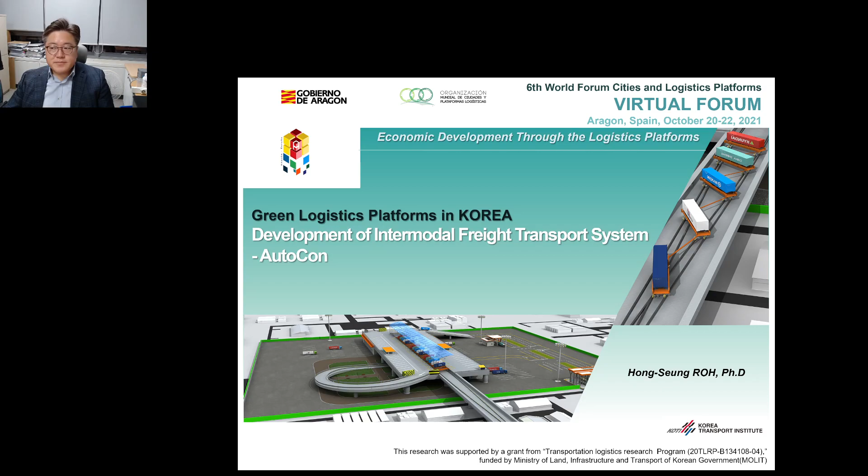Before starting my presentation, I would like to introduce my research institute first. The Korea Transport Institute, called KOTI, is an official research agency for the government of the Republic of Korea. The mission of KOTI is to provide recommendations and alternatives for the nation's transport policy and create the optimal transport system through specialized research and technological innovations, while positioning itself as one of the world's leading transport research institutes.

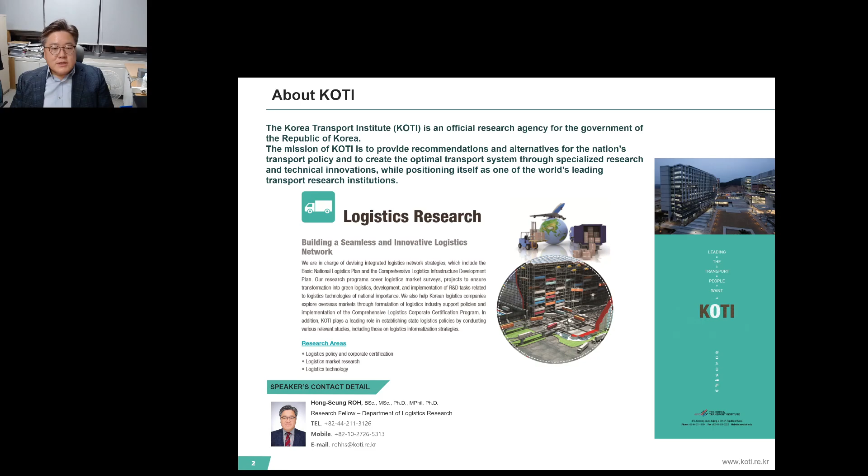It's a kind of non-profit research institute, different from other consulting companies. Not only for the Korean government, but we also support many international institutions like the UN, World Bank, or OECD, something like that. In this institute, I'm working on logistics research. So today, I'd like to introduce the logistics technology that I am developing in this institute now.

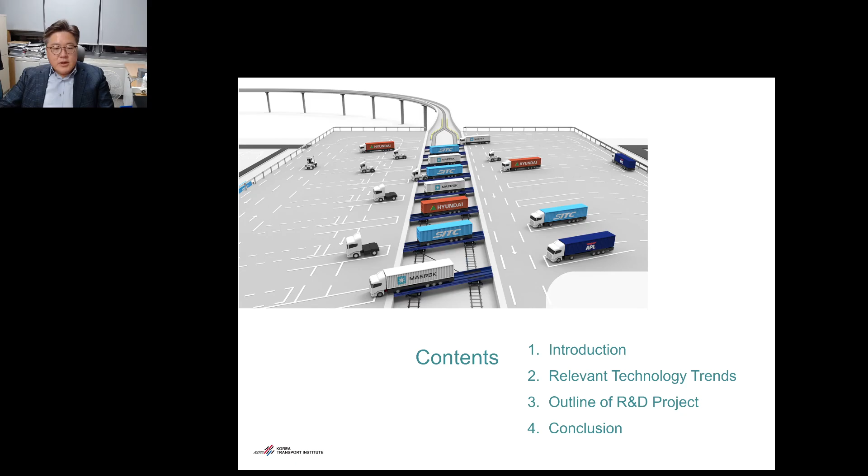Today's presentation consists of four parts. The first part is the introduction, the second part is the relevant technology trends, the third part is the outline of the R&D project, and finally I will end with the conclusion. Chapter 1 is the introduction. I will introduce the background and the aims of the R&D.

Development of the automated intermodal freight transport system is required to maximize transport and energy efficiency by minimizing cost and greenhouse gas emissions. Limits of road freight transport are a critical point in Korea because Korea is a very small country compared to European countries or other world countries. So there are strong limits on the alternative transport modes.

For railways, problems occur due to the excessive new investment cost and extra facilities for the unloading and loading procedure. So the addition of railway unloading stages, track capacity limits, and the passenger priority policy are a serious problem in Korea.

Besides railways, we can consider coastal shipping as well, but timing and stability problems occur due to unpredictable weather conditions. So 97% of national transportation depends on road transport, like trucks or trailers. This kind of problem is the background of this new technology development.

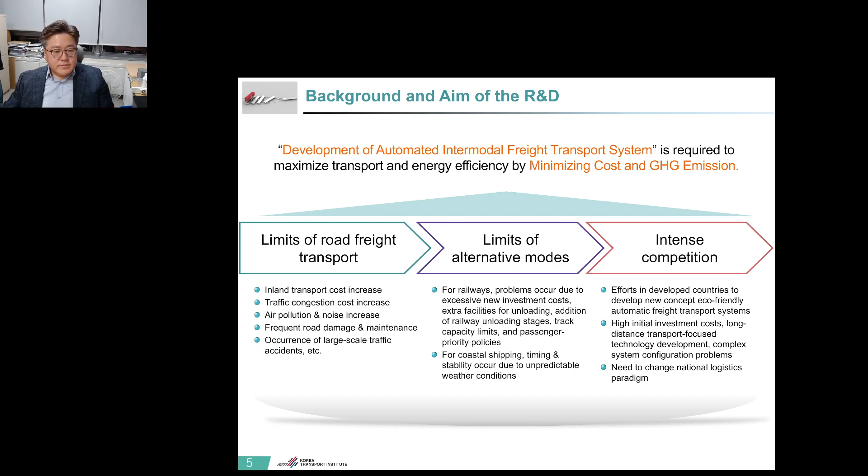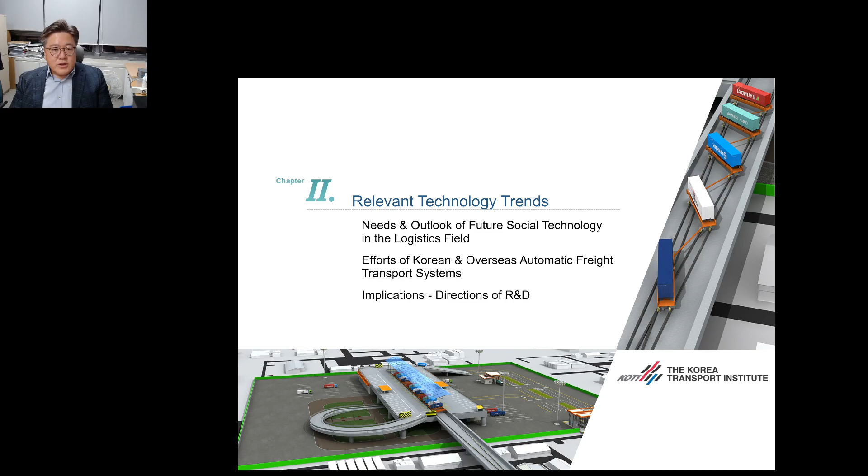Chapter 2, I will introduce the relevant technology trends. As you see in the picture, there are so many transport technologies used in the world, and these technologies are developed over time. For individual trucks and vehicles and containers, technology is developed to use other energy.

Hybrid trucks, truck trains, or platooning systems are applied to improve the efficiency of transport now. And many electric trucks are applied in the field. And in Korea, the hydrogen fuel truck is also developed. In the future, green fuel or new energy will be used for freight transportation. Auto platooning and other operation technologies are also developed. So in the future, unmanned automation will be general.

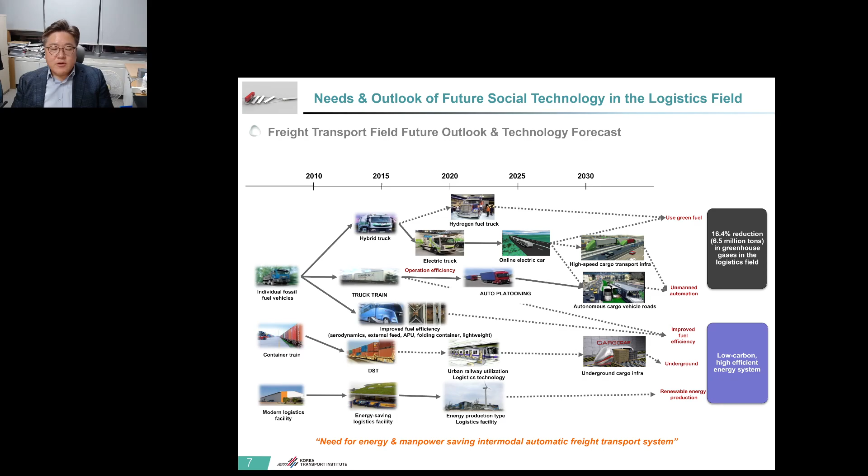And to increase the efficiency of stacking, we are developing the double stack train, and urban railway utilization logistics technologies are also being developed. In the future, underground space will be used for freight transport. And modern logistics facilities not only consume energy, but will also be used for generating new energy in the future, including solar energy or wind energy, something like that.

There are so many efforts, not only in Korea but also overseas, on automatic freight transport systems, especially in the USA and some of Europe, including Sweden, Belgium, Germany and the Netherlands. So many efforts are being conducted now, not only underground but also over bridges. So many new transportation technologies are developing.

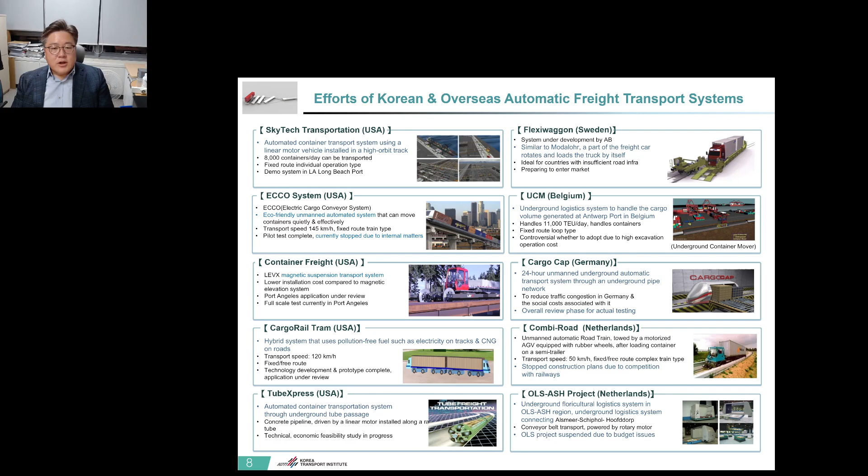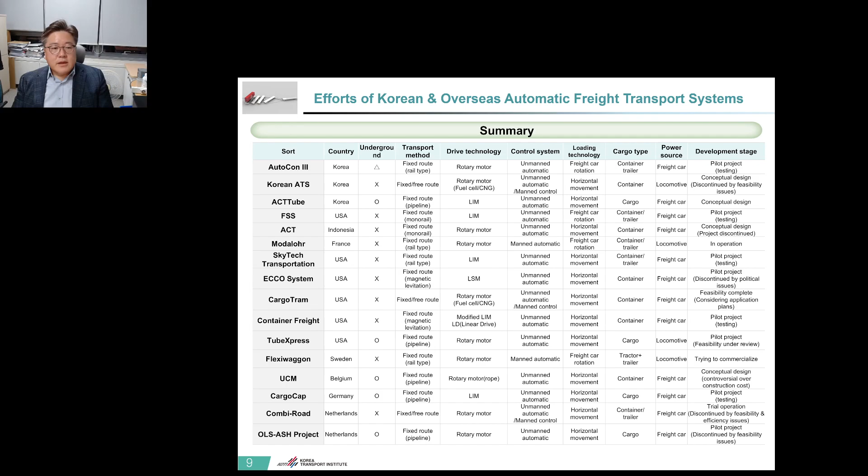This table is a summary of this kind of technology development. Among them, part of it is in the development procedure, but part of it has stopped developing. So you can see the country, the transport method, traction technology, control system, loading technology, something like that. If I summarize, this technology depends on the countries. I will introduce Korea first.

Since 2010, R&D technology planning research has been started in Korea. So since 2010, technology advancement has been formed, such as AutoCon, Korean ATS, ACTTube, some systems, and so on. A representative example of research is the AutoCon system, developed by KOTI, which I will introduce today. If you have interest in it, you can refer to the case studies shown in the slide.

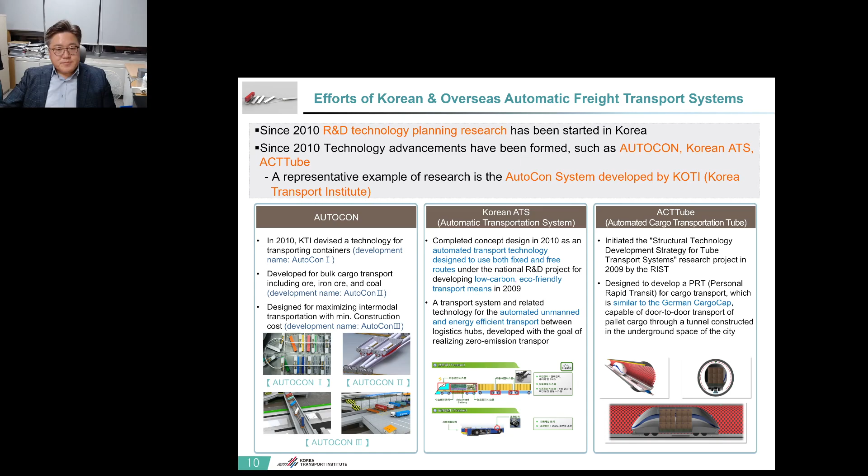And in other countries, since the late 1900s and early 2000s, the US and Europe began to focus on eco-friendly transport system technologies, developed into automated cargo transport systems between logistics hubs, real-time overload prevention system technology, and tube-type underground freight transportation system technology, which is developing now. It is still at the pilot operation level due to the high initial investment cost.

There is intensive competition among FSS, ACT, ECCO, SkyTech, UCM, and these kinds of technologies are developing now. But unfortunately, until this time, none of this kind of new technology is general in the real world, except the Modalohr. On the right hand side, you can see the Modalohr was invented in France. Lohr is a company name, and the system name is Modalohr.

The system was developed by the Lohr Group in France to transfer trailers to freight cars by rotating the freight cars. Cargo handling begins after obtaining an access permit and passing a storage area. Five or six professional operators are stationed in the 350-meter terminal, which handles 30 cars in a single arrangement.

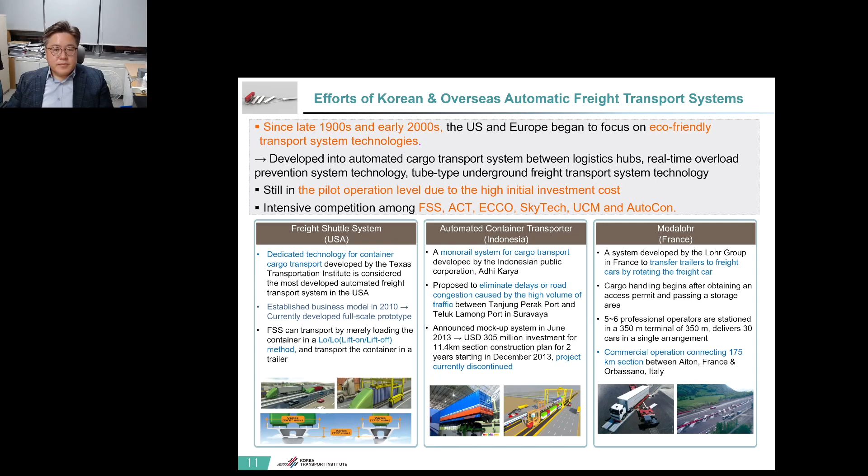If I summarize the trends of automated freight transport system technology development, you can see five perspectives. From the transportation perspective, most systems are automated, dedicated routes are used for transport, and intermodal systems are emphasized. From the automation perspective, manpower reduction, cost saving, and safety enhancement are important.

From the spatial perspective, elevated infrastructure above the ground is used in many countries. From the energy perspective, electric power is usual. Electric motors are very efficient to propel this kind of vehicle, so using electric power is a characteristic of most of the new technology. In the case of cargo form, most cargo is shaped by containers. Container trailers or container boxes are the unit of transport.

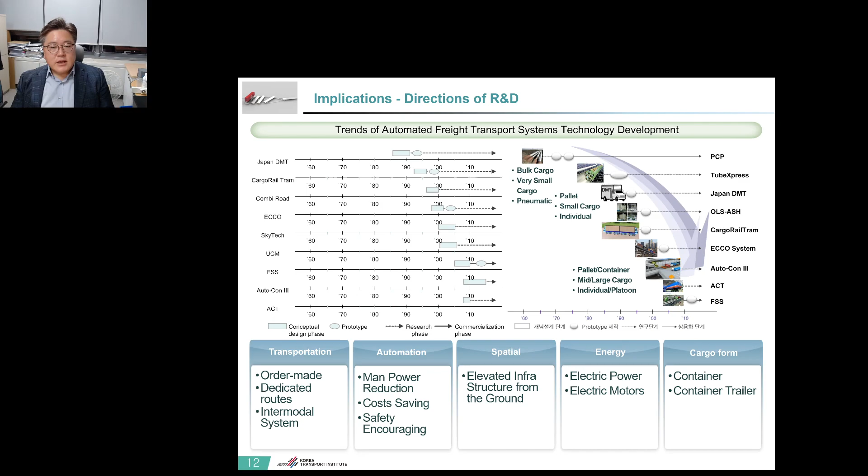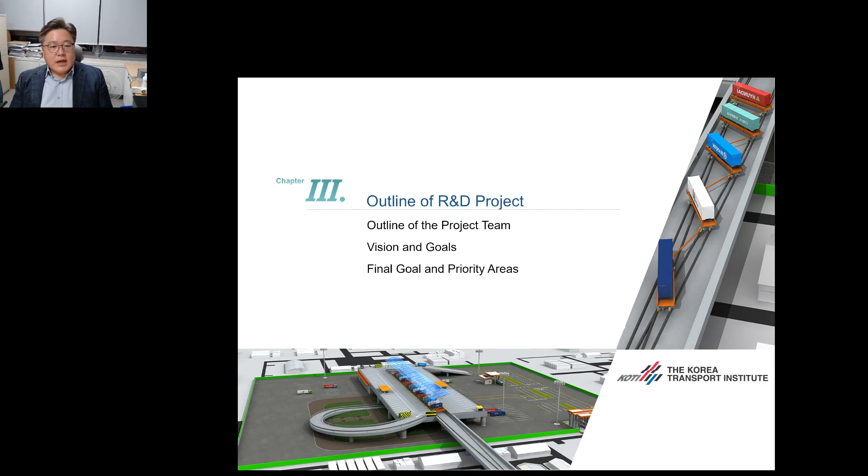Let's move to chapter 3. I will introduce the outline of my R&D project in Korea. Before starting the introduction of my technology, I will show a short video to introduce my technology. Okay.

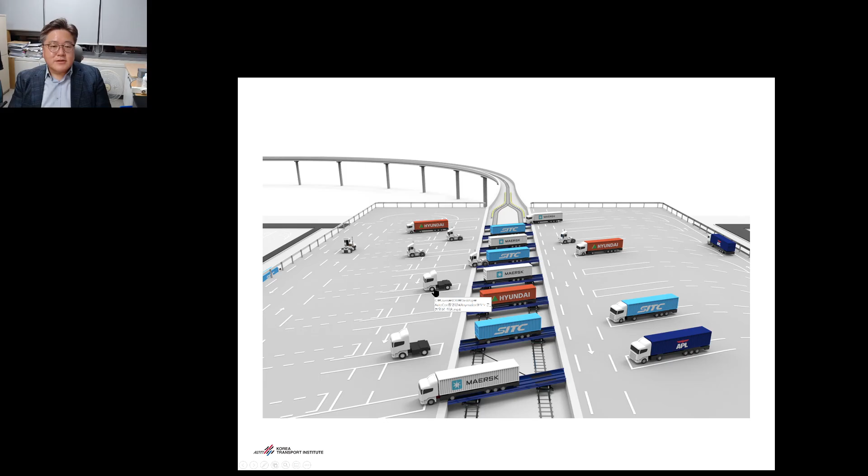Okay, have you enjoyed the video? It was a very short video, but it was sufficient for understanding my system. The project name of this technology development is Automated Intermodal Freight Transport System. This project started in 2017, continues this year, and will be finished at the end of this year.

This project is hosted by KOTI, and the budget is 13.6 million US dollars. Among them, 10 million US dollars is supported by government, and 2.8 or 2.9 million is supported by private sectors. So it's not a small project, and we are continuing to develop this technology until the end of this year.

This project team consists of three parts. The first part is infrastructure, the second part is vehicle and propulsion, and the third part is system operations. As you see, a total of 9 companies are supporting this project, and almost 100 people are working to develop this technology now.

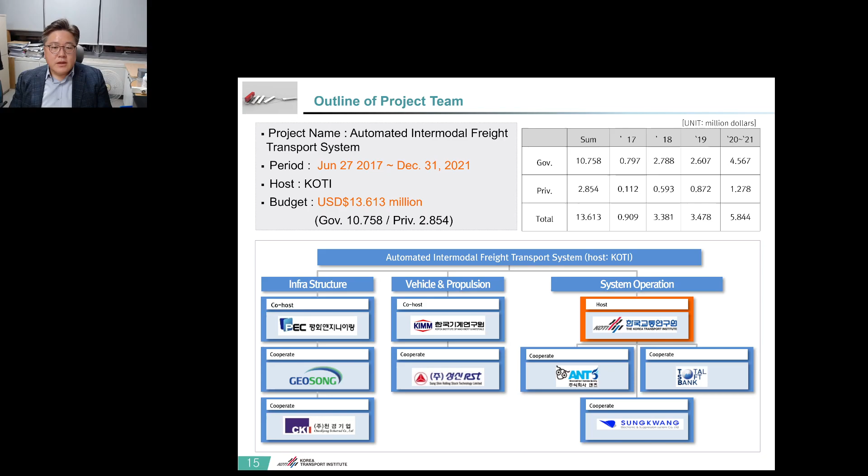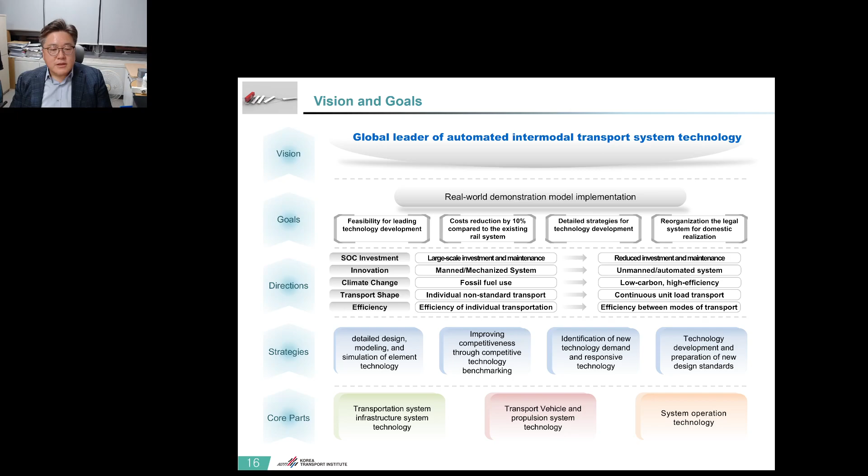There are 4 strategies developed for developing this kind of technology, and the core part is divided into 3 parts. The final goal is securing the technology for real-world demonstration and model implementation, and as explained, we established 4 main goals with many specific technology development goals. This technology development consists of 3 key areas: first is infrastructure, second is vehicle, including the propulsion system and operation systems. On the right hand side, you can see the detailed technologies about this.

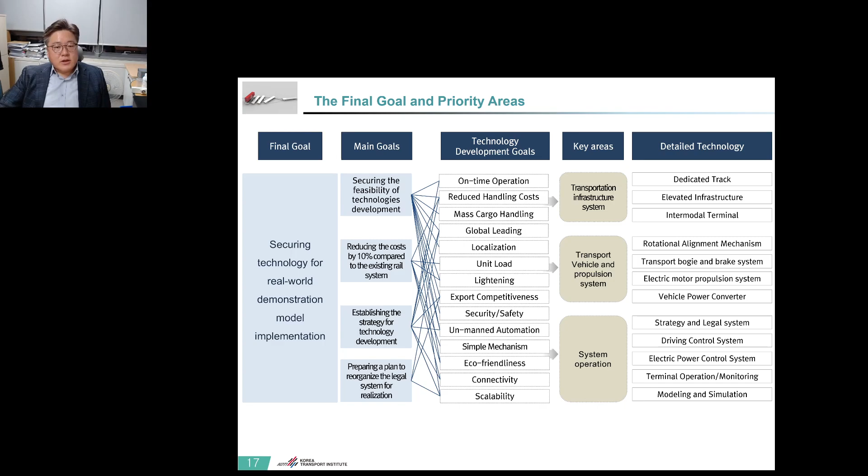The transportation infrastructure system development continued for almost 5 years, and we finished constructing the pilot test, a kind of test bed in Korea. Now, as you see, we have already built a 400-meter long railway dedicated for this autocon system.

The second part, transport vehicle and propulsion system, is almost finished, and we finished making a real size train. The third part is the operation system, which we also finished developing. Now, as you see, we finished making the real size train, and this is operating now. You can see a short video about this.

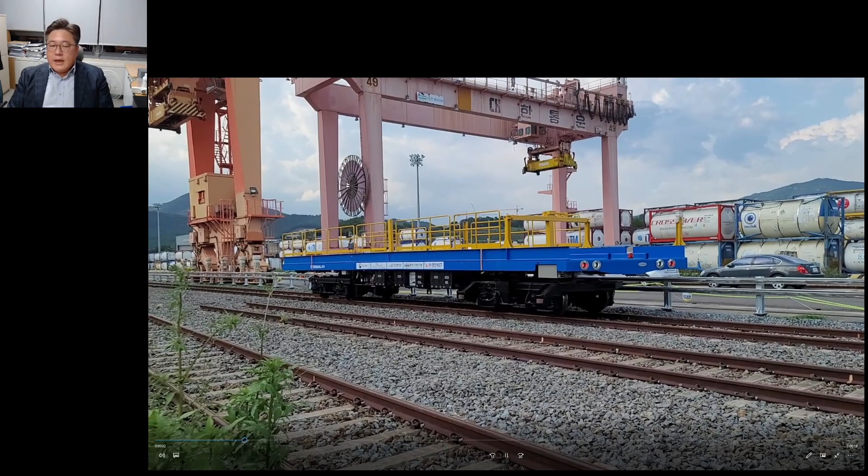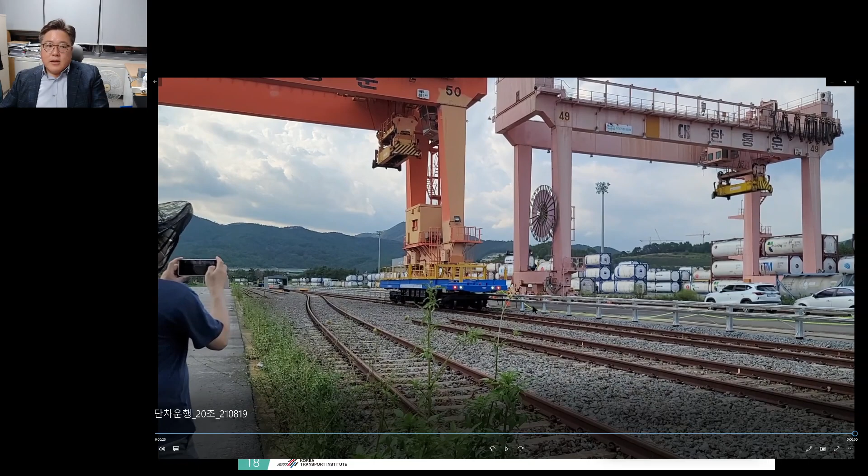As you see, this train is moving on the dedicated railway now, and we continue testing on the 400-meter long test bed in Gwangyang Port, located in the southern part of Korea.

It's a famous container port in Korea now. This kind of testing will continue by the end of this year, and this test bed will operate not only this year but also next year or the year after, for several years. So if you're interested in this system, please welcome to Korea and find the test bed in Korea.

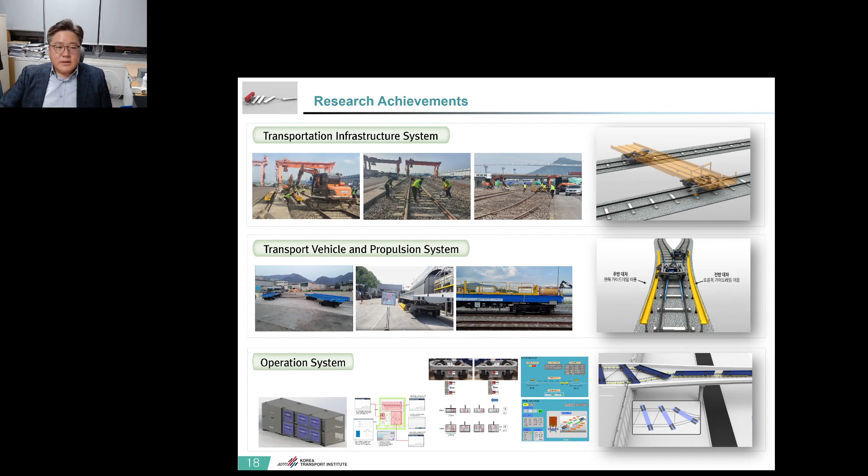Now, as you see in the short video, the system operates following this kind of process. First, container vehicle entry to the terminal and loading on the train without any cargo handling facility like a crane, forklift, or top handler or something like that. There is no cargo handling equipment or facility necessary.

The second part is container trailer loading on the train. It's like parking in a parking lot. So the truck drivers or trailer drivers drive by themselves on the train along the lane very easily and remove the tractor. So the container on the trailer remains on the train, and it's a very short lasting process.

After that, the trains depart the terminal and move to the end of the terminal. During the transport section, they arrive at another terminal, then enter the transition section, move the wagons along the rails, and rotate.

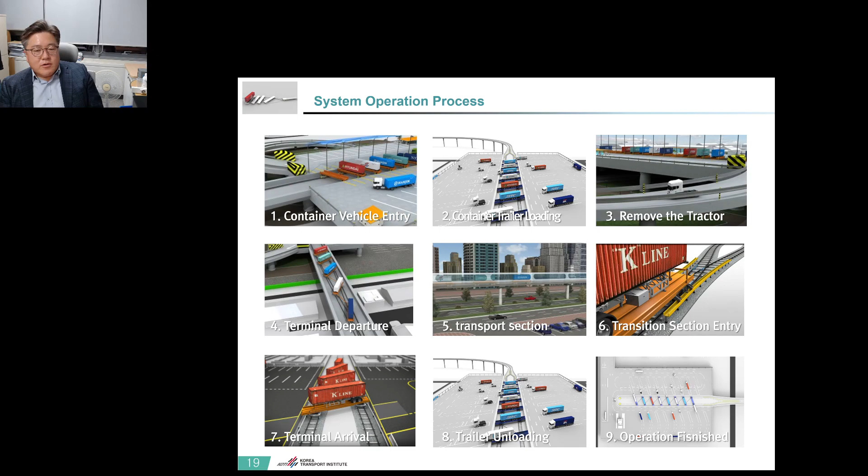So I will summarize the advantages of this technology. This technology uses a roll-on, roll-off container handling system to reduce loading and unloading cost. The loading and unloading process of the train is not necessary, and simultaneous loading and unloading work is available. It means zero loading and discharging cost. As mentioned, in the case of short distance shuttle transport, loading or unloading costs are equal to transport cost, and actual transportation costs are reduced by half.

The second strength is construction cost saving, and individual operation is possible by excluding the locomotives. As you see in the video, there are no locomotives. By excluding the locomotives, which weigh 150 to 200 tons, it's very heavy.

It is only necessary to support the weight of the vehicle, about 60 tons per vehicle, making it possible to reduce the weight of a railway roadbed structure and significantly reduce construction cost. After our calculation, infrastructure construction costs account for 70 to 80% of the total project cost, so if we can save on construction weight, we can save a large part of the construction cost.

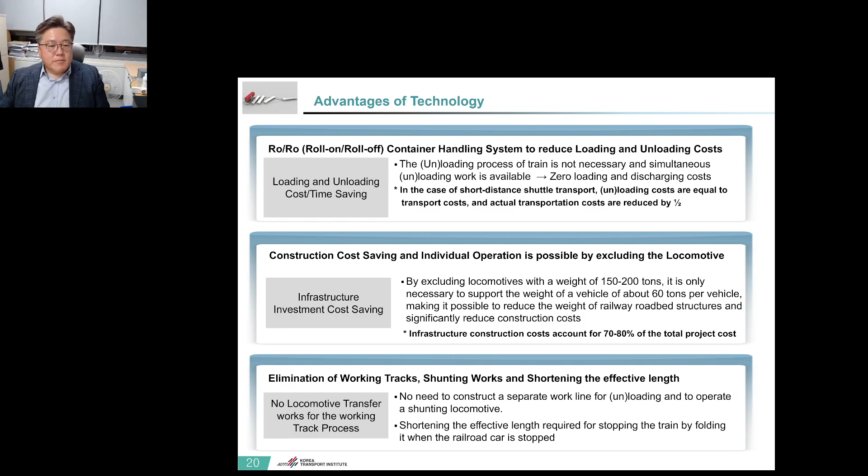So shortening the effective length also requires stopping the train by folding it when the railroad car is stopped. If we use this kind of system, we can make a very short and small railway container yard, so it is very efficient compared to existing railways.

This is the conclusion. We develop technology utilizing renewable energy, especially electricity. Actually, electric power is not zero emission - carbon neutrality is not realized. In the process of generating electric power we do produce some carbon, but comparatively it's a low carbon, renewable energy, so we can consider this energy.

By eliminating the unloading process, we can save logistics cost, and we don't need any cargo handling equipment except trucks and trailers. We're considering unit cargo, especially container boxes, first. We can apply this technology not only to containers but also bulk cargo or general cargo, including cars.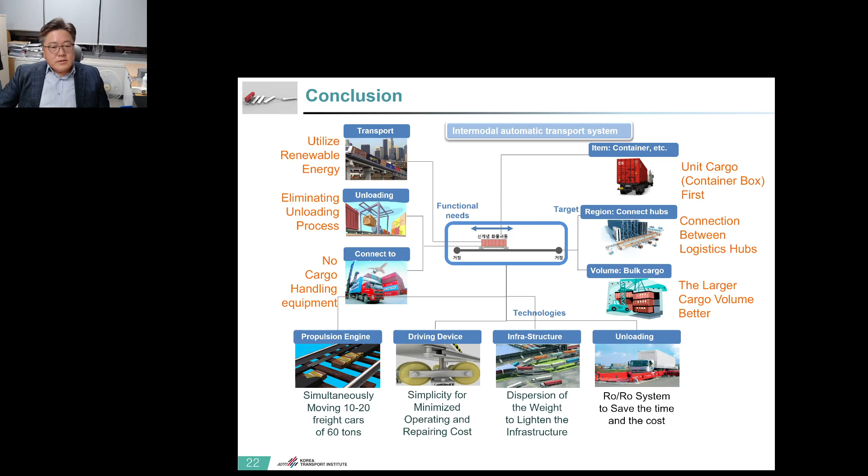And for the economics of the investment, a larger cargo volume is better rather than small cargo volume. The technology has already been mentioned, so I will stop the explanation about technologies here.

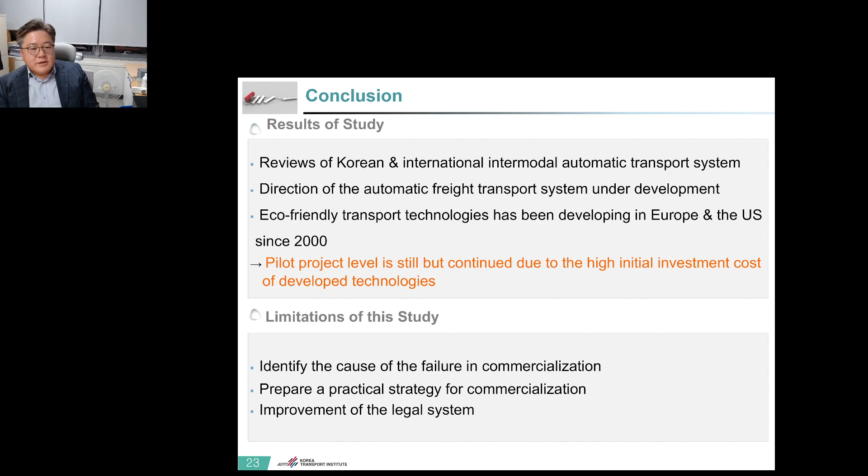Of course, there are so many limitations of this study. I need to identify the cause of failure in commercialization, and I have to prepare a practical strategy for commercialization. Improvement of the legal system is necessary because it's new technology being applied to the real world. These limitations have to be overcome in the future.